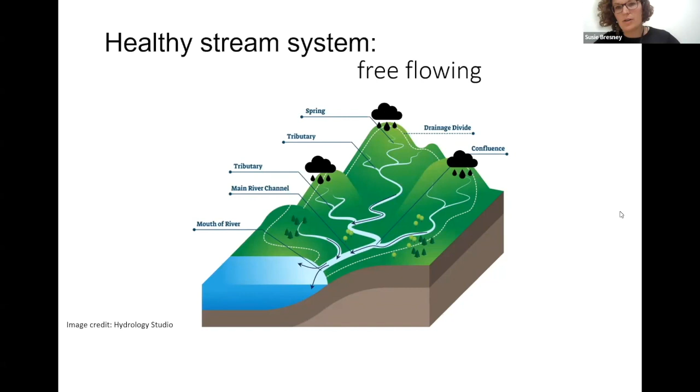So a healthy stream system is free flowing. You have your watershed with tributaries and main stem that flows out to the mouth of the river. In the Nashua River Watershed, that might be where it flows out into the Merrimack, or where the Merrimack flows into the ocean, and the water can move freely from upstream to downstream, from rain and groundwater to the downstream and mouth of the river.

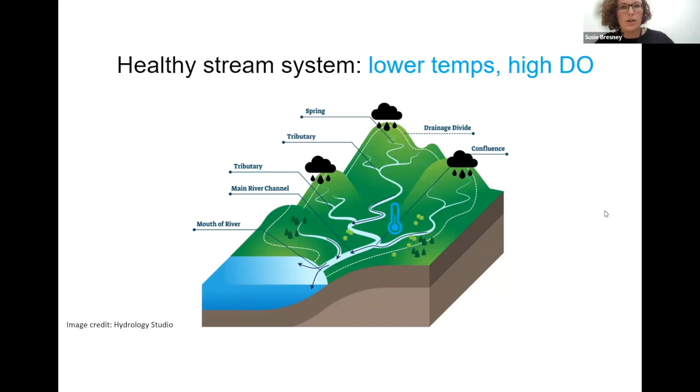Because it's free flowing and the water doesn't get backed up or stagnant behind a dam, that results in lower temperatures overall, typically within the watershed and in the tributaries. In the Nashua River Watershed, there are a lot of cold water fisheries, which are important resources for certain species of fish. These free-flowing streams maintain those lower temperatures, and with lower temperatures and faster moving water, you have higher dissolved oxygen, which is good for fish and all aquatic life.

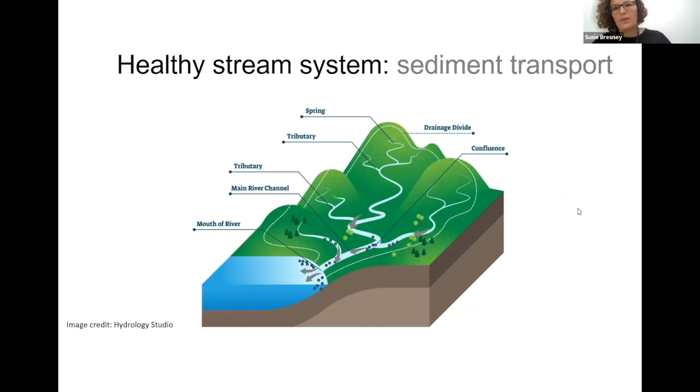That free flowing also allows for the movement of sediment transport from the tributaries down to the main stem and the mouth of the river. And with that sediment, also nutrients are transported both within the water and also within the sediments.

And all of those things combined result in healthy wetlands and floodplains. As you replenish the sediments and nutrients into the lower, flatter valley parts of the watershed, you have these healthy wetlands and floodplains, which provide habitat and also provide flood protection and opportunities for water to fill the floodplains during high flow events.

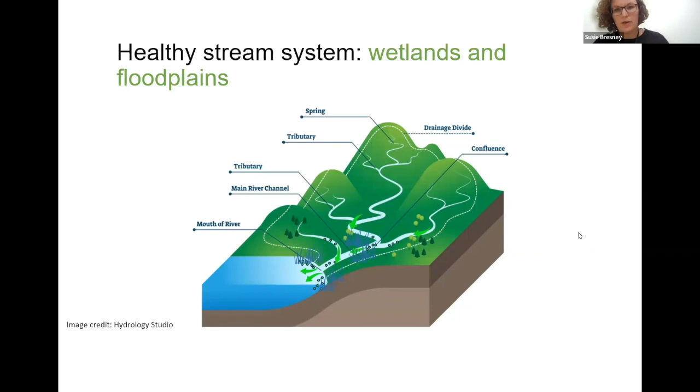Also, this allows for fish passage upstream, so either from larger rivers like the Merrimack up into the Nashua, or from the Nashua up into tributaries, or from the ocean up into the watershed. Fish can move upstream, and this brings nutrients from lower parts of the watershed up into the higher parts of the watershed. And not just fish, but many other organisms move upstream, either hitching a ride on fish like mussels do, or being carried upstream by other means and other aquatic organisms.

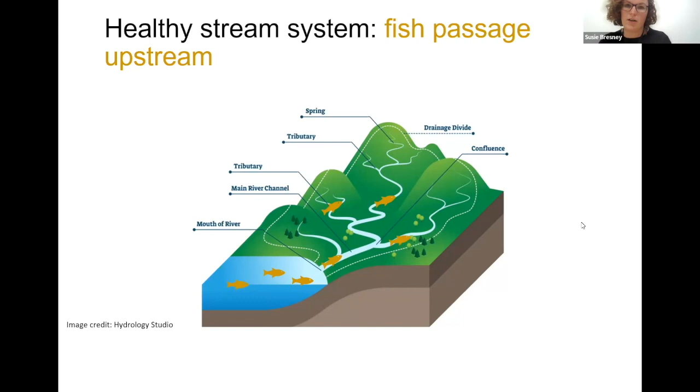And then, of course, we have fish passage downstream. All of the nutrients and habitat and everything upstream supplies an area for wildlife to grow. Fish is one representative one, but it's not just fish that pass downstream, it's many other organisms as well, also otters, turtles, lots of other aquatic organisms. And this movement of all of those aquatic organisms, both up and downstream, allows for the balance of the food chain and the support of the food systems within the lower part of the watershed and the upper part of the watershed, and for those to be connected.

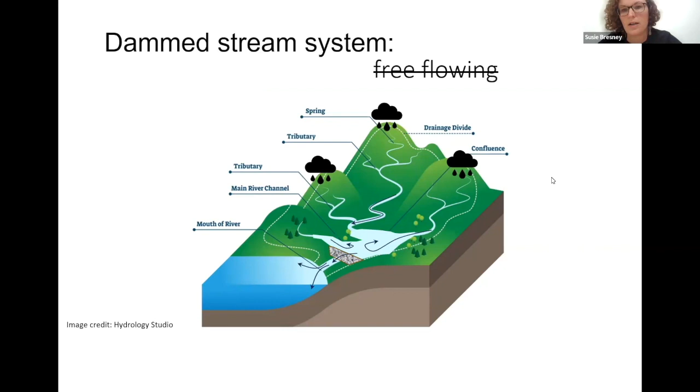So now let's take a look at what this looks like with a dam in place. You no longer have a free-flowing system. Water gets stagnant behind the dam and spends a lot more time there. As a result, temperatures rise in the water behind the dam, and that means that temperatures flowing out of the dam downstream are also higher than in a free-flowing system. Also, with higher temperatures and slower moving water, you get lower dissolved oxygen, which is challenging for different aquatic organisms to survive in conditions with lower oxygen levels.

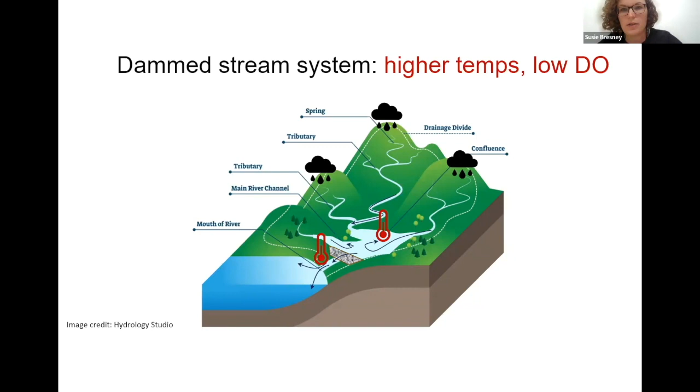You no longer have the same sediment transport regime, so sediments can get stuck behind the dam. They do move downstream during really high flow events, but less often, and they travel more in pulses. So you have a lot of sediment getting trapped behind the dam, and with that sediment are also nutrients that get trapped behind the dam. And all of those things can cause water quality issues, algal blooms, eutrophication, and other issues in the impoundment behind the dam.

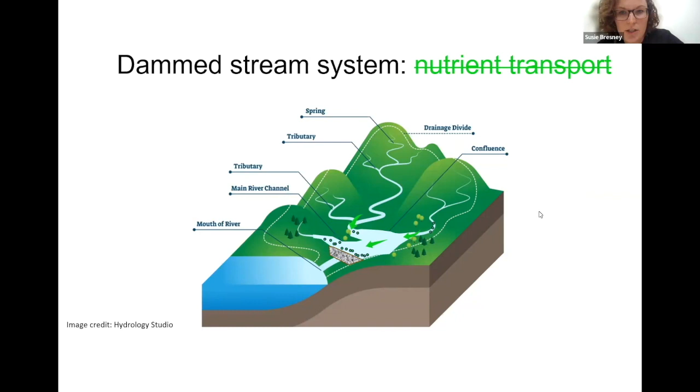And then, of course, you don't have the same amount of fish passage. I'll mention also the wetlands and floodplains. Without that replenishment of sediment and nutrients downstream, you don't have the ability to build those wetlands and floodplains and vegetated buffers along the river.

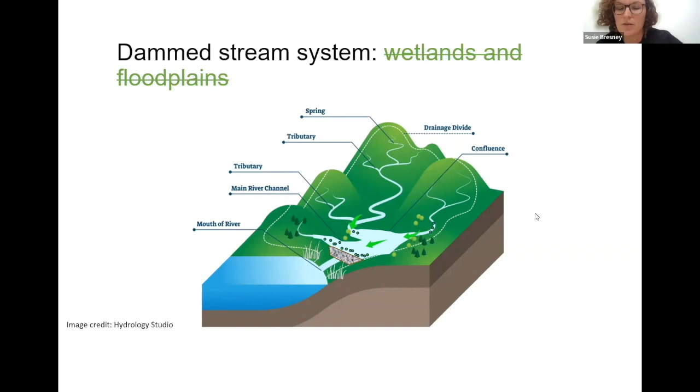And of course, behind the dam, your wetlands and floodplains are impounded and underwater. So fish and other aquatic organisms can't pass upstream, and also some can pass downstream, but not all. So you have limited fish passage downstream as well.

And so ultimately, this is what your dammed stream system looks like, with a disruption of the flow of nutrients and aquatic organisms and water, both up and downstream.

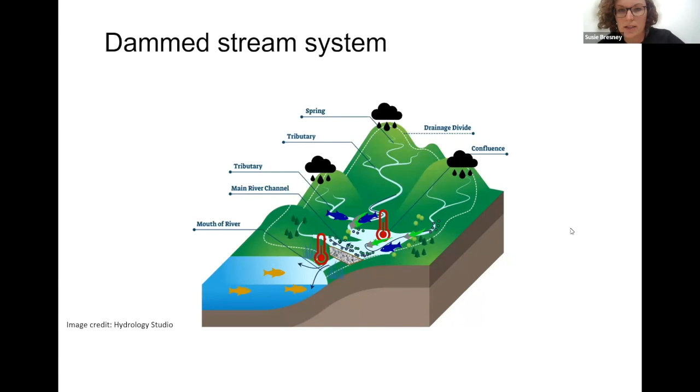So when we remove a dam, we restore all of those ecological benefits that a healthy river system provides. We restore that natural thermoregulation of temperature, which improves water quality and increases dissolved oxygen, restoring the natural sediment and nutrient transport regime allows for healthy floodplains and wetlands, replenishing the downstream areas.

You have habitat connectivity up and downstream, and by removing the impoundment, you restore the benthic and other biodiversity in the stream. So all the macro invertebrates that much of the aquatic life lives on and needs to survive can be restored in the stream system behind the impoundment, behind the dam.

So I'll talk a bit about the financial and public safety benefits of dam removal. This is really relevant for, I think, many of you who are either municipalities that may own dams or individual private dam owners. This is really where the benefits probably are most important to you.

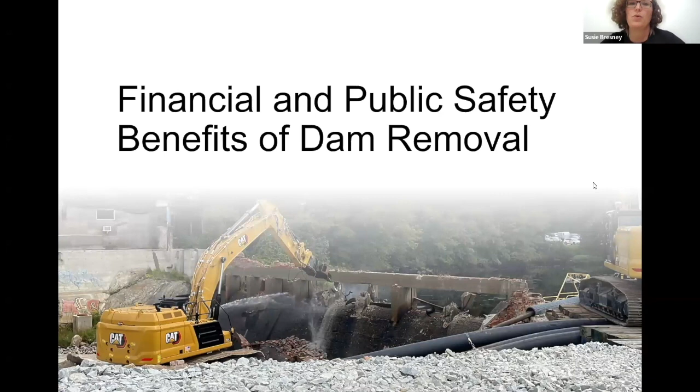So this is a project of ours out in Western Mass. This is a dam that we're working on to remove. As you can see, the dam is damaged and degraded.

There's a big concrete block that's fallen off the face of the dam here, and there's water coming over one section of the spillway. During high flow events, you can see on the left side of the picture here, at the bottom of that retaining wall, water has been undercutting that retaining wall, which weakens it.

What you can't see to the left of the picture is that retaining wall is part of a culvert. There's a road just off the picture to the left.

And so this dam requires a lot of maintenance to get it up to par with what the Office of Dam Safety requires. And so that's expensive, and it can be one time, but really it's ongoing consistently that maintenance is required. So there's the financial need for that, and there's also inspections that are required.

If your dam's in particularly bad shape, you need inspections more often. So this is one of the financial liabilities of being a dam owner: the inspection and ongoing maintenance costs.

Then, of course, there's the risk of dam failure. So both the safety hazard of what happens to the people and infrastructure and everything downstream, but also what happens to the environment and environmental resources downstream.

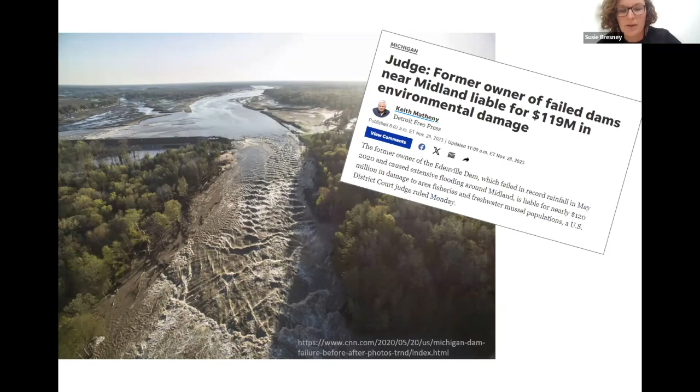So this dam currently doesn't pass the flood size that's required by the Office of Dam Safety. So in order to bring this up to meet the Office of Dam Safety requirements, the dam would either need to be widened or raised, or probably a combination of the two.

Additionally, this dam is one where there's a diadromous fish population. So this dam's required to build fish passage, which it doesn't currently have. So a fish ladder would need to be built, or some kind of fish passage, which is expensive and a lot to maintain.

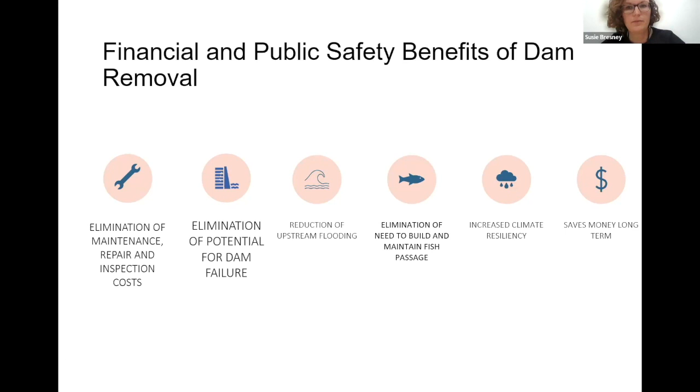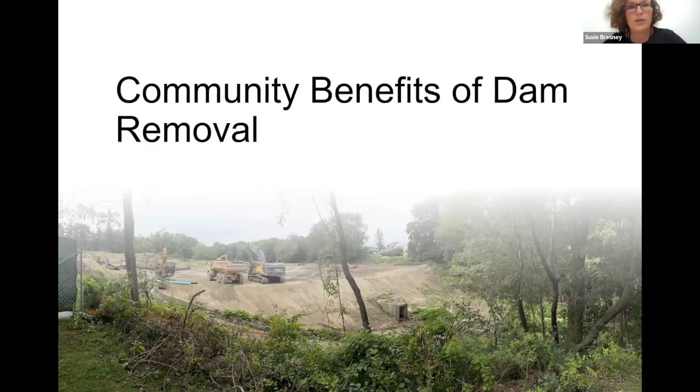Lastly, I'll touch on some community benefits of dam removal. Of course all the public safety and climate resiliency benefits are major benefits to a community living nearby a dam or using a road or transport near a dam. But there are other benefits too, and I think it's important for municipalities to consider the opportunities of having these co-benefits of dam removal.

This is a similar example, on Abbey Brook in the city of Chicopee. This is a series of two dams located in Szot Park, right in the city. Both are being removed, but the lower one is being removed first — actually it's underway right now. Similarly, they're building a floodplain park within the former impoundment. You can see through the former impoundment there'll be a new channel, and along that, some different trails, trees, and other public access points.

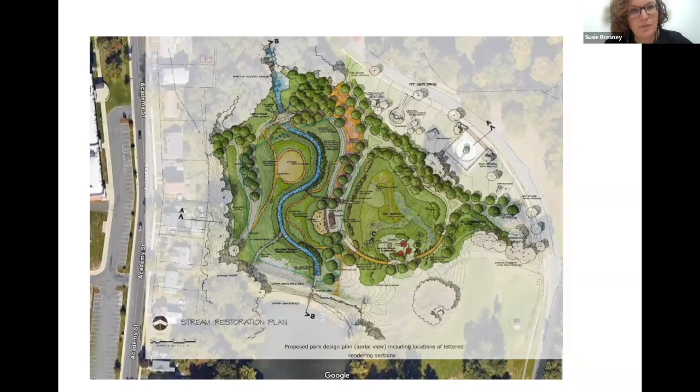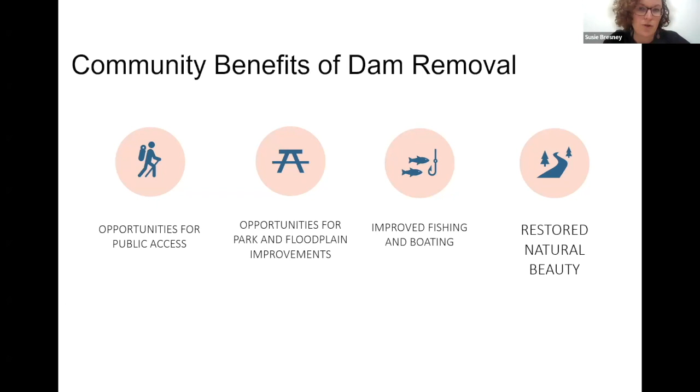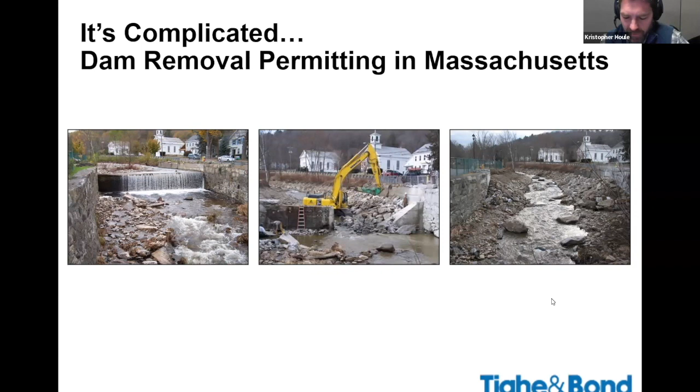Now I have to say, when I was asked to present on dam removal permitting in 10 minutes, I thought, wow, that's impossible. But it was fun to try to find the highlights, come up with the elevator speech of what is most important when it comes to just dam removal permitting, and what messages do I want you to walk away with from this presentation. So this presentation is a portion of one that I gave back in October, a longer 30-minute type presentation. So at the end of it, you'll see that there's a link to a full version of this presentation. So feel free to reach out to me if you have any questions about that, but I'll come back to that later in the presentation.

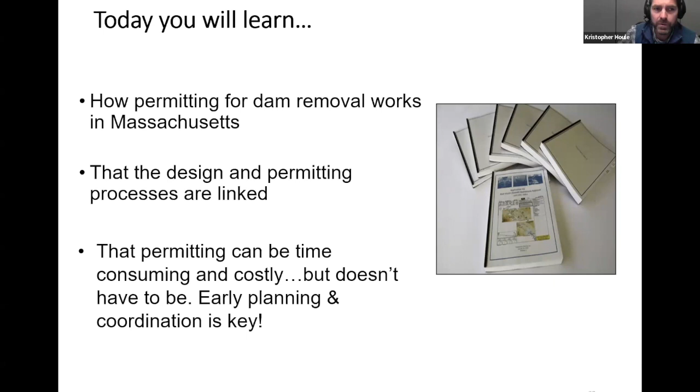So today, you'll learn how permitting for dam removal works in Massachusetts. I'll discuss that the design and permitting processes are closely linked, and that permitting can be time-consuming and costly, but it doesn't have to be. The key to that is early planning and coordination, and I'll explain that a bit more here.

So first, a little background regarding the regulatory climate in Massachusetts. Over the last decade, there's been significant improvement in the climate and culture around dam removal permitting. So in 2014, Mass DEP issued revisions to their Wetlands Protection Act that attempted to streamline dam removal permitting. They created a category of projects known as ecological restoration projects, which dam removals fall under. And what that did was help provide a clear list of conditions for a project and help expedite the review at the local level for these projects. Because if you think back 10, 20 years ago, there weren't that many dam removals that were done here in Massachusetts. That, of course, has changed over the last 10 years or so.

Unfortunately, though, those changes to the Wetlands Protection Act were very visionary at the time, but similar changes weren't made in other regulations, for example, the 401 water quality standards. So what you saw was a great idea, but in terms of implementation, it didn't really necessarily change how quickly the dam removal permitting process would take. However, this January, MEPA, the Massachusetts Environmental Policy Act, did implement a set of regulatory revisions that I think really helped to realize the streamlining that was envisioned back in 2014. So essentially, if your dam removal project meets a set of eligibility criteria and can qualify as an ecological restoration project, you can then apply for an expedited review through the MEPA process - a more simplistic filing, and essentially a much quicker process.

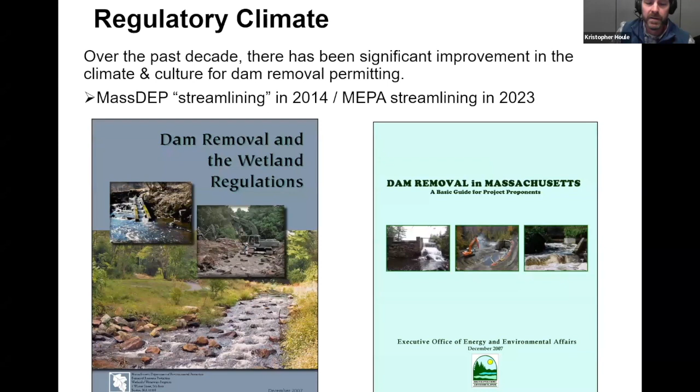One quick note here, I have photos of two guidance documents that you'll see that are dated back to December 2007. So they're a little out of date when it comes to the current regulations, but still really good information in here for helping you along the way in your dam removal process. Really good steps in terms of outlining steps that you might take. Next slide.

Similarly, if you go to a 60 or 75 percent design phase, think about what permits are most appropriate for that phase and how outcomes of that regulatory process may inform your next phase in design.

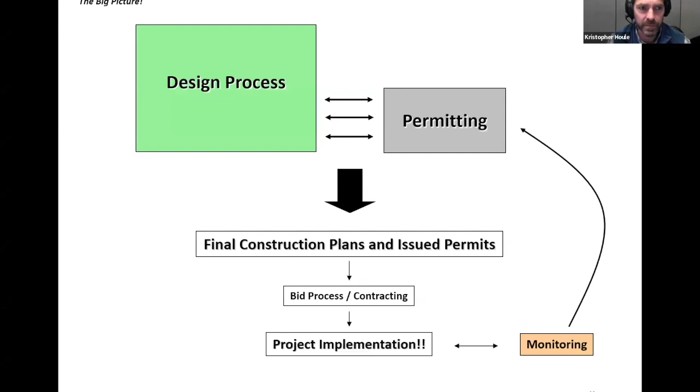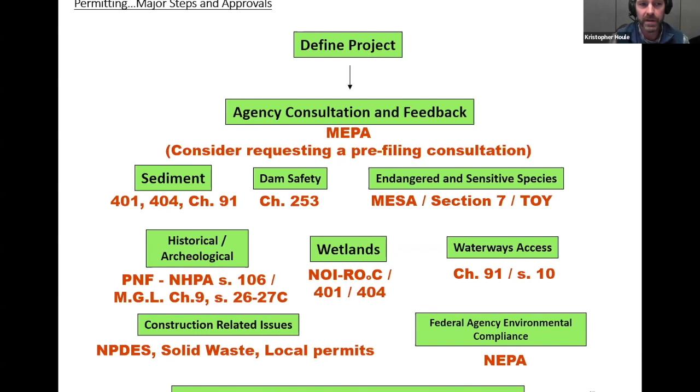This is one slide in a sequence from my other presentation, but the take-home message is that in order to make your permitting process easier, you need to establish clear goals and objectives and communicate that to your regulatory agencies. For example, if your goal is to provide fish passage, your objective will be to remove the full vertical extent of the dam. Or if your goal is to improve water quality, your objective is to dredge sediment.

Similarly, if your goal is to eliminate public safety risks, you propose to stabilize surrounding infrastructure around the dam. You need to describe your existing and proposed conditions, identify regulatory resources around your project, and predict anticipated changes. For example, if you have a large dam impoundment and you remove the dam, and you expect land under water to change to bordering vegetated wetlands, you need to depict that through base mapping and delineations.

You want to make sure to define your construction methods, best practices, and sequence of work. For example, how will the work get done? How are you going to access your site? Where will you stage materials you're bringing onto the site, like rock? Where will you stage materials you need to remove, like dredge sediment? How are you going to control water on the site, and make sure you're working in the dry, dewatering the site when you're actually trying to remove the dam? These are all things you need to be thinking about and communicating early.

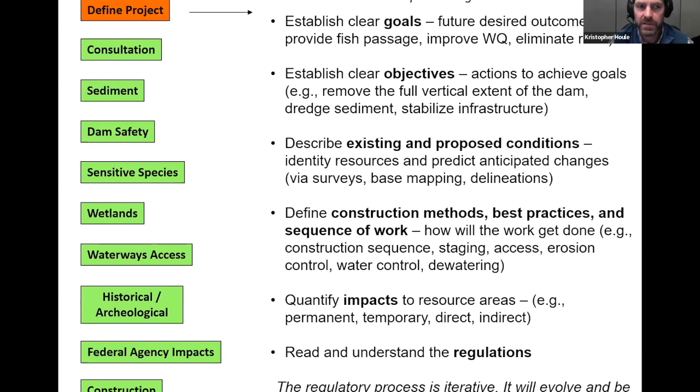Lastly, just promote the project benefits. These are all things that the regulations support and the regulators support as well. My project's going to restore river processes, provide fish passage, improve water quality, lead with these benefits and explain your project through that lens.

Not a slide I'm going to read in detail, but this is just a typical permitting roadmap that you can refer back to in the future. The columns on the left side of the screen are sort of a typical order for dam removal permits. Understand some of them are sequenced together though, so you might get one before the other, but think of the permits on the left as a typical order. The column in the middle is the major issue that permit is concerned with, or aspects you need to provide. The column on the right is just a typical time frame based on my experience, but understand those can change significantly based on staff resources at that particular agency. So again, just refer back to this as a resource later on.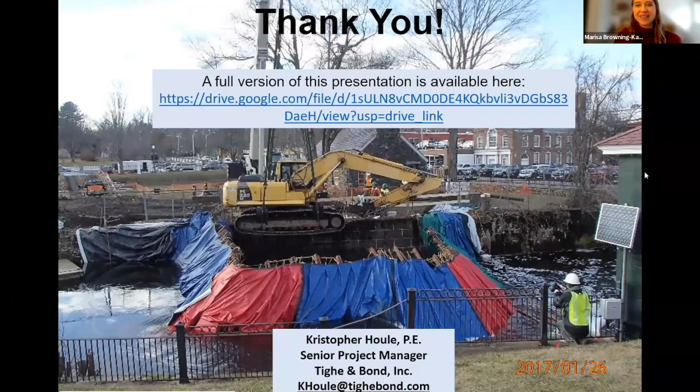Good afternoon everyone, my name is Bill Hinkley and I'm with the Executive Office of Energy and Environmental Affairs. One of my roles here is to administer the Dam and Seawall Repair or Removal Program, which is one of the funding avenues we have available for this type of work in Massachusetts.

Susie did a very nice job of explaining the many benefits of a dam removal program or project. We really categorize these into three key benefit areas to the community. The one I'd like to talk about first is the safety elements. Susie noted the Office of Dam Safety, this is the statewide regulator of dams in Massachusetts, and they do a really important job for everyone in the state. One of the things that's very important to understand is that the Office of Dam Safety categorizes each dam of the 3,000 or so in Massachusetts into a number of categories based upon their potential risk to the public were it to fail, and their physical condition.

So many communities are really facing, as Susie mentioned, long-term costs related to the maintenance of their dams, and it can be very costly. Depending on the size and hazard class of their dam, a community may also be out of compliance with the regulations of the Office of Dam Safety.

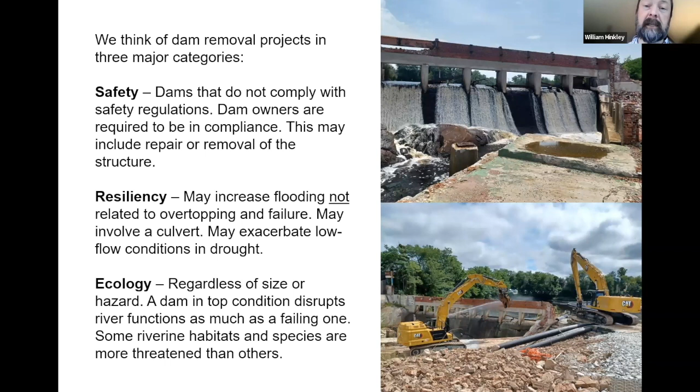Finally, looking at the ecological benefits of a dam removal - Susie mentioned the numerous benefits removing a dam can have on the ecology of the site nearby. So those are three different ways of looking at your dam and your project. It's very important to understand your particular structure and what key community benefit is going to drive this removal project. It could be all three, but each of these categories is going to have different funding sources attuned to the benefits in these three categories.

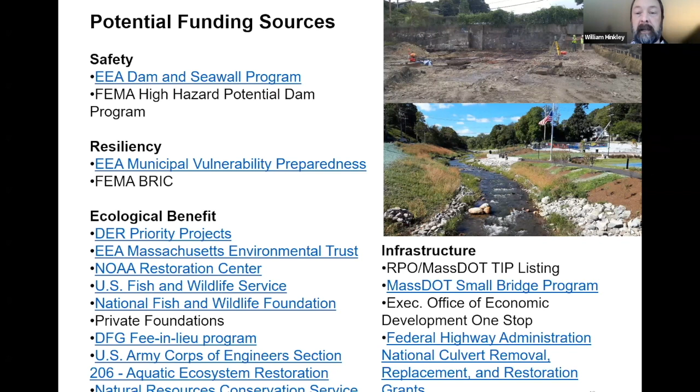And then finally, I'd like to address a couple of key cost drivers. Dam removal projects tend to be very expensive, and it is not uncommon for a dam removal project to exceed $1 million, not uncommon at all. So I just wanted to point out some things that are expensive and can add to the cost and complexity of a dam removal project.

Bridges and culverts are probably some of the most expensive infrastructure that may be impacted by your project, because as the flow changes in the river from what it was to the new future condition, you may have to mitigate against those new flow conditions. That may involve replacing or providing scour countermeasures at that infrastructure, and that can be very costly.

Sometimes the utilities are embedded within the dam structure, and these will need to be accounted for and oftentimes moved. In Massachusetts, contaminated sediment is a very common occurrence, and that's going to add to the cost. Poor site access is another one - as you're considering the funding, I'm not going to go through all of these, but just want to call out a few of these items.

If it's difficult to get to the structure or difficult to get machinery into the water, it can be a very costly addition to the project.

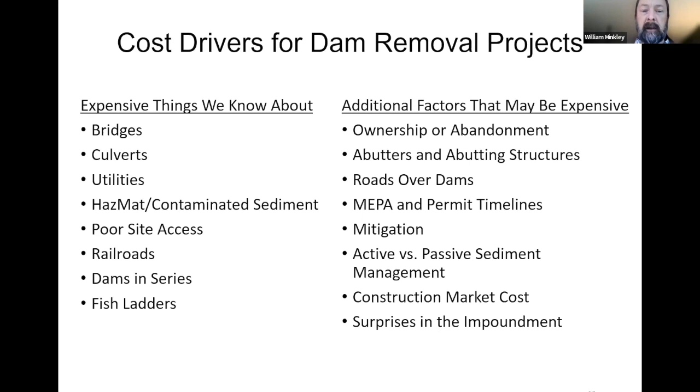All right, can you hear me all right, Marisa? All right, yep, sounds like I'm bringing up the rear. So my name is Neil Shea. I'm the Restoration Program Director at the Ipswich River Watershed Association, and I'm going to talk to you quickly about a few things about getting public support and why it's important in these dam removal projects.

So why care about public support? A lot of dams in our region are privately owned, so what's stopping those private owners from just going ahead and making those projects happen? That's kind of what I wanted to talk a little bit about today, why it is so important to get public support.

There's been a lot of research looking into the more social aspects of these projects. I say this as a scientist, so this is definitely not my field of expertise, but I've learned a lot about these projects as I've worked on them and realized how important the social aspect is. Every dam project is different and offers its own unique set of challenges, but one commonality, which sounds oversimplified, is that the more support a project has, the less resistance it will encounter. The wider and more diverse your partners and support, the easier your project is going to go.

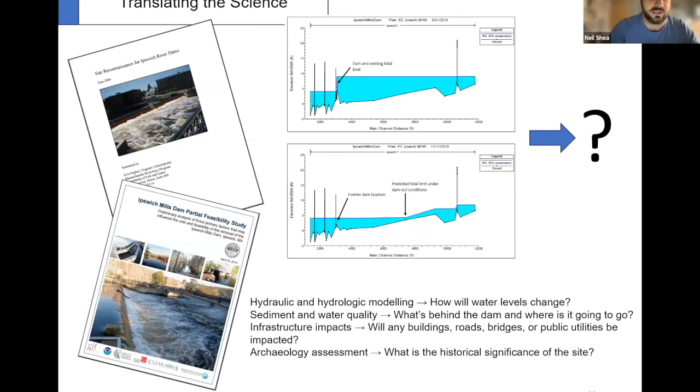So as people trying to push these projects forward, you have to figure out who is your audience, and what are the pros and cons to your specific dam removal—not just ecological reasons, like Susie touched on, but community benefits and town benefits too.